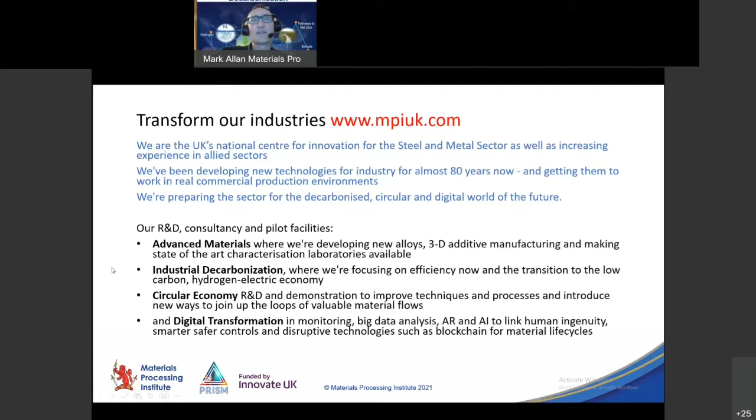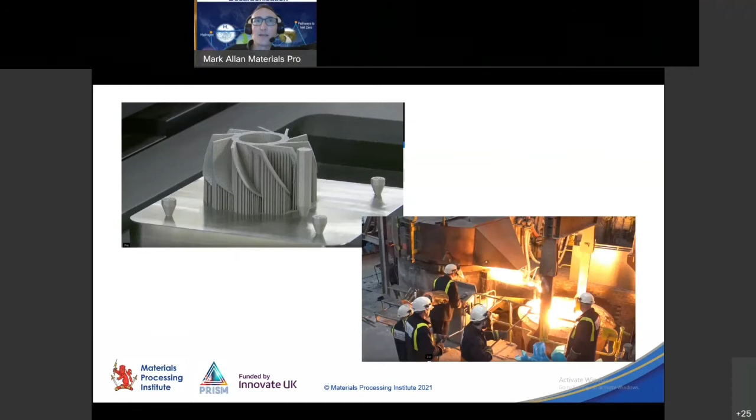We are engaged in materials development from the small and disruptive, like 3D additive printing, to the more traditional melting and casting facilities we've got there. But even there, we have to look at ways of decarbonizing those elements of steelmaking. We have digitization and enhanced controls and ways of visualizing things when we are building new furnaces. The furnaces we plan to install over the next one to two years at the Institute will be largely centered around hydrogen as the heat source, or as the reductant source. But we also plan to create digital twins so they can be visualized remotely.

We can show researchers, customers, interested parties and stakeholders what's going on, without everybody having to be clustered around. Having said that, at the end of the day, nothing quite beats being clustered around hot metal and actually making things with it, because you can't build your entire life online on software.

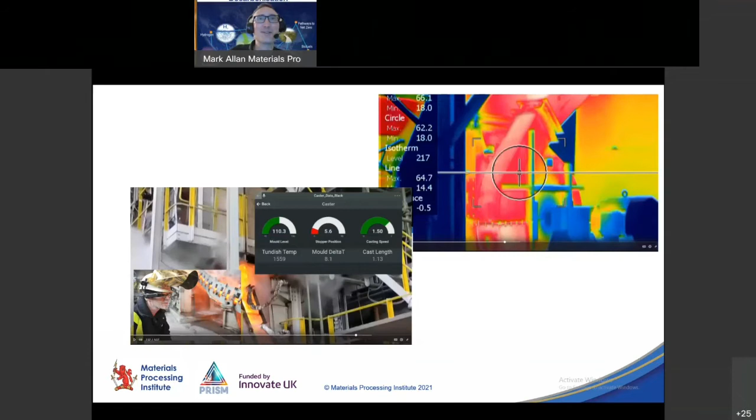But the impact of hydrogen's potential invasion as an energy source, and the levels of research, development, understanding, communication, and education that need to follow it, goes, as in these pictures, from the macro level right down to the micro level.

There is a wealth of information, published papers and communication that's gone on so far around the trials, pilots and potential for use of hydrogen in anything from large-scale reheating down to the atomic-level reactions going on for metals reduction. But, as anybody with an inquiring mind knows, the more information you gather, the more questions you have. So

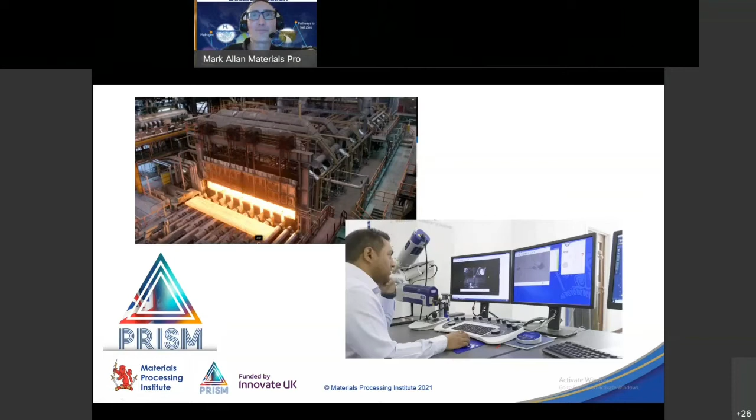I'm leading up to start talking about hydrogen soon, but the context for that picture of Teesside Beam Mill was some work we did last year, 2021, looking at some of the potential heat recovery options within that mill, and that is bang in the middle of this spectrum of stuff we have to look at in decarbonisation, moving from energy efficiency and improved process controls right through to fuel switching.

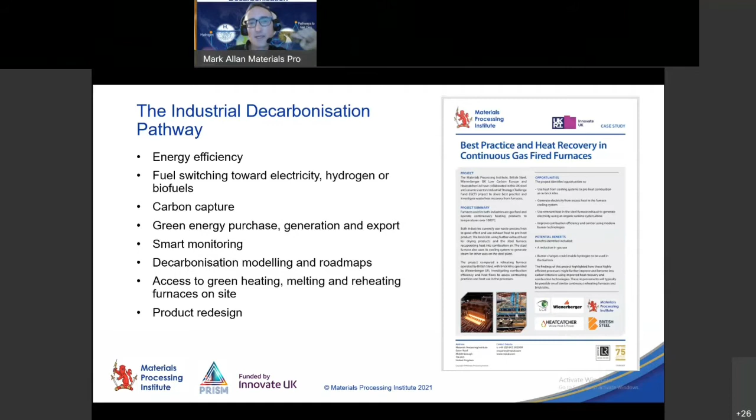But one of the obvious questions for large heating mills like that is, if you have to decarbonise and your customers are starting to push you for a green product, something they can label as green steel in their buildings or their cars or their tin cans or whatever they want to make with it, really. Nuts and bolts.

Then you are in good company, because most of the manufacturing sector is now starting to feel this pull from the customer base to decarbonize, as well as the push from the government announcement of the UK's net zero ambitions. We may be a little bit ahead or a little bit behind others in terms of setting targets, but it's a trend across the developed economies of the world,

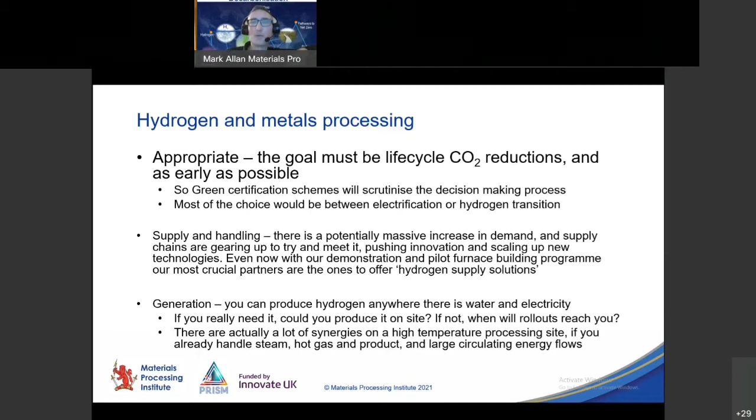Right. I'll try and speed up so we've got time for some chats and questions.

The transitional aspect of hydrogen in metals processing, I'll try and concentrate on that, is really in the area of gas heating. There's ambitions. The target moves back a little bit here and there, but there's ambitions and aspirations to be able to decarbonize the national gas network up to about 20 or 30% by feeding in hydrogen, and that's been proved to be feasible and safe and manageable,

because basically it doesn't create the need to do any burner changeovers or technology changeovers really. So, in that sense, it's analogous to the fact that most of our petrol now is 10% ethanol rather than all fossil.

Anything above that 20-30% level, you do start to need some changes in burner setups or controls, in pressure controls and in safety strategies as well, particularly for safe ventilation. We've spent quite a lot of time this year at the Institute doing the risk assessments on ventilation and where we are currently allowed to site hydrogen pipe runs and so on, as we try and invest in a small network of hydrogen for the site, so we can do the innovation we want to.

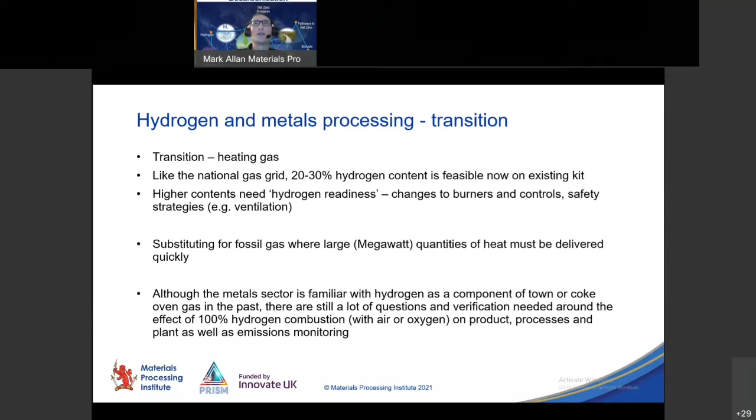So that's part of the transitional element to it. Still disruptive because it changes the way you have to operate, and some of the issues of supply and procurement and so on. But the more disruptive element of hydrogen, certainly what we're involved with, is looking at it as a reductant, as a chemical agent rather than necessarily as a heat source.

So this is the driving force behind most of the headlines around green steel, is that it can be made with hydrogen as the reductant rather than coal or natural gas, and then that is married up to whatever approaches you want to use to actually melt the stuff down and turn it into steel, which I'll leave there because that's a whole other set of lectures and conversations.

But this is the area where, in terms of disruption and in terms of competition, there isn't another clear front runner really, other than saying we want to go down the hydrogen route, or we want to use more hydrogen in the reduction of iron ore and other ores as well. It attracts the headlines. It is still quite an unfamiliar technology, though. I'll say that it is still at pilot stage around the world.

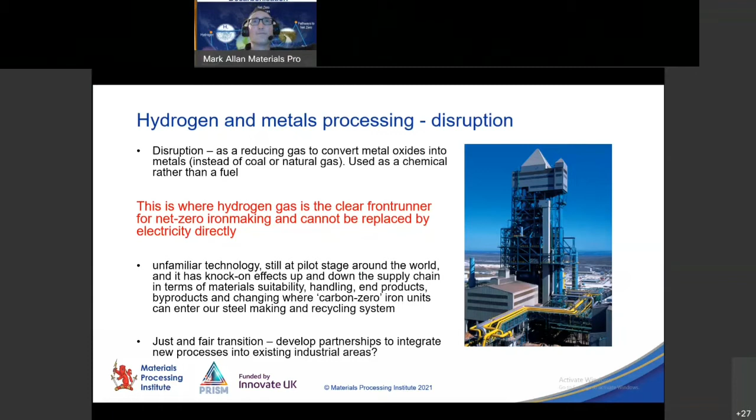Okay. I'm not far off the end, but I just wanted to share a back of the envelope calculation just for some scale. And this is based on numbers from a couple of years ago, so it's not pinpoint accurate. But if you wanted to just decarbonize steelmaking by going down a hydrogen electric route, or a hydrogen route instead of coal for iron making, just say, why don't we just do that? You know, there's your big tick. There's your emissions reduction for the year. Why don't you just make it with hydrogen? Not as easy as it sounds.

And one of the reasons behind that is you would need more hydrogen than we currently make in the country anyway. And the increase in electrical demand, well, you can debate the numbers, but the bottom line is we came up with a figure of about 6.5 million households. So it's equivalent to a couple of large cities worth of electricity. It's not a small amount, because, as we know, the energy intensity of fossil fuels, and coal in particular, is what's driven and maintained the industrial revolution up to the present day, basically.

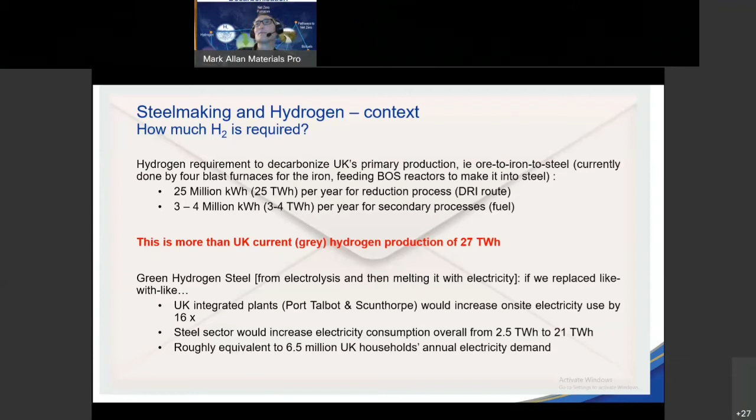It's not without cost. So again, the national conversations around the overall impact on carbon dioxide levels in the air, or greenhouse gas levels, more to the point, have got to be had as intelligently as possible. Okay.

I'm going to move on and give some time for chats and questions. Some of the work that we're doing in Eston, or wherever you want to describe the location of the institute, just around the back of South Bank train station, is really to invest in pilot furnace for heating, and pilot reduction equipment for green iron making, linking that into green steel making, but also getting enough hydrogen usability for other people innovating in the space, who want to look at hydrogen electrolysis and lower energy ways of producing hydrogen.

Teesside University, for example, does quite a lot of work on electrolysis membranes and other processes like this, to pick a local name out of the air, but also a lot of more established energy producers in the area. There is a lot of innovation, a lot of ingenuity locally and nationally, but giving some space and the enabling framework that lets the innovation happen, lets people get their ideas up to the next phase, particularly now when there's so much interest and potential investment and technology development going on around sustainable hydrogen.

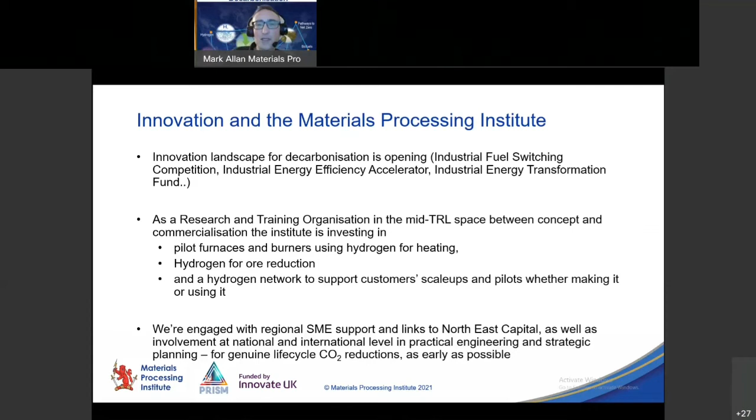So I'm gonna leave it there. I haven't been able to see the questions, but if I close my slides, I think I'll then be able to see all the chats. Thank you.

Thank you, Mark. The usual thing we do is I read out most of what's in the chat. I've been keeping an eye on it, and there seem to be more comments than actual questions.

Alan Scholes says, much of the world still thinks we can hit CO2 goals with minimal disruption and still expect a world with cheap energy. In that context, hydrogen gets bundled in the too expensive box. How do we wake people up to the reality that energy is underpriced in relation to its societal value and accept that this has to end? I don't know whether you've a comment or an answer to that, Mark. Anybody else got any ideas?

Yeah, if you want to speak, you'll need to unmute yourselves either by pressing your space bar and holding it down, or there should be a mute, unmute button somewhere in the band at the bottom.

While people are plucking up the brain power to respond to that question, part of what I'm trying to do today and in similar kinds of conversations is to make sure that we bundle the implications of the choices we're making in with the sort of excitement around the technical possibilities of it, to make sure that we're talking big picture and keeping our eye on the actual goal of trying to reduce the rate of increase of greenhouse gases.